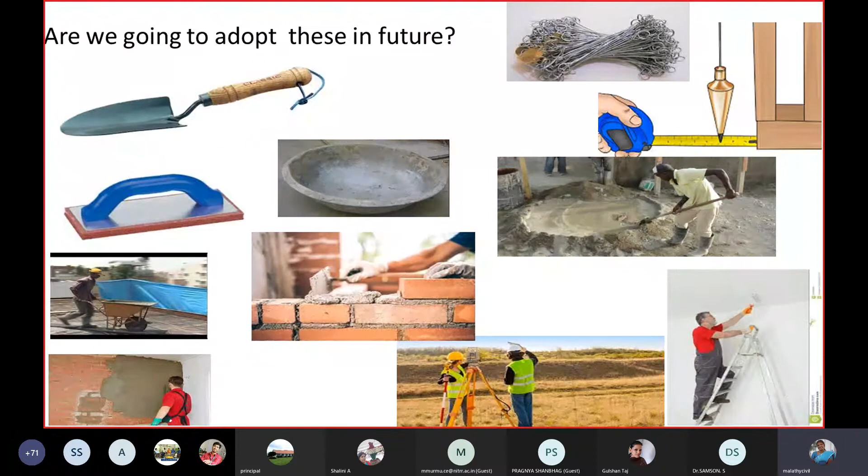So if this is the case, what are we going to do in the construction industry? Are we going to adopt all these things in future also? Definitely not, we have to go with digital construction. Why do we have to go with digital construction?

Definitely it is faster and cheaper. It will provide proactive safety and collaboration, real-time communication and automation. So let us see one by one.

If you see this faster and cheaper aspect, definitely digital construction is going to increase visibility, improve workflow, and streamline the scheduling.

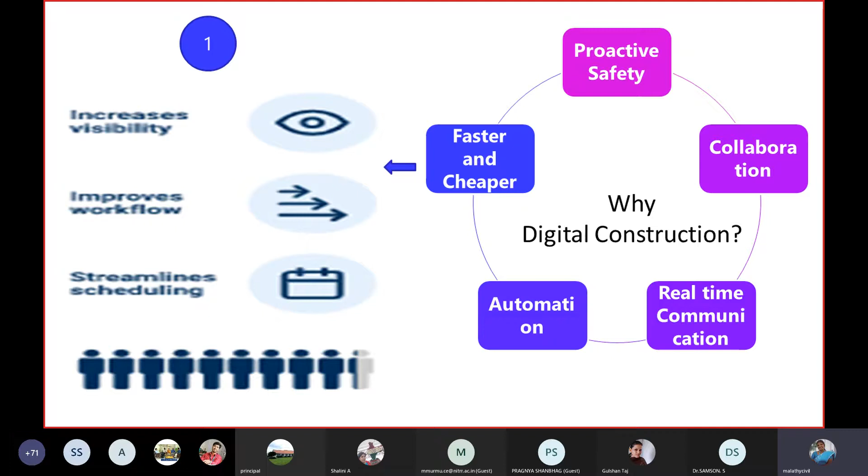And proactive safety, in the sense, it will shorten the response time and log and track safety inspections, then increase documentation and accuracy.

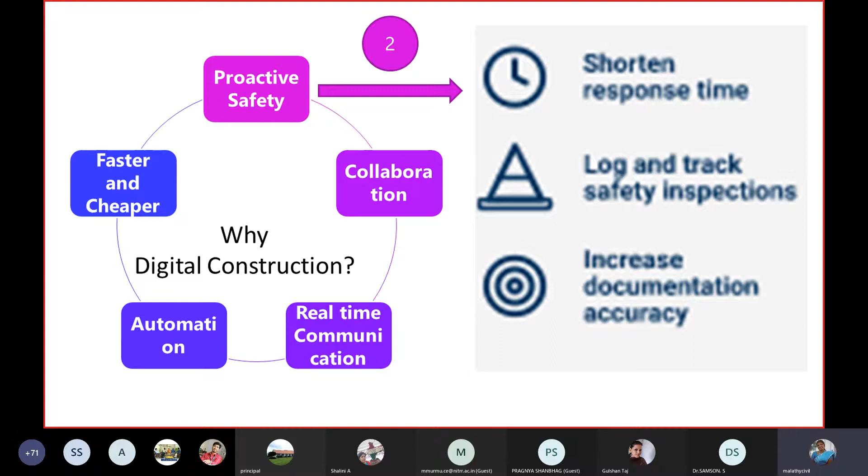And regarding collaboration, definitely with this digital construction, you can go with real-time collaboration, digital punch lists, improved quality control, then collecting digital signatures. So instead of getting a signature and having that document passed, you need not wait for a long time.

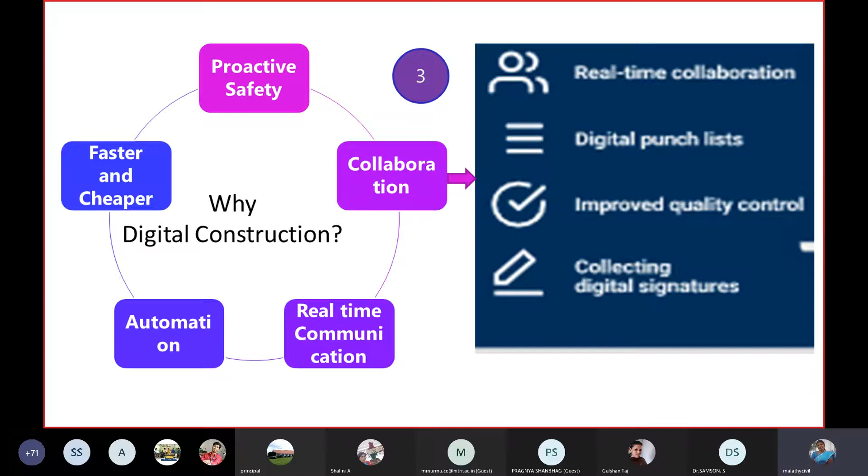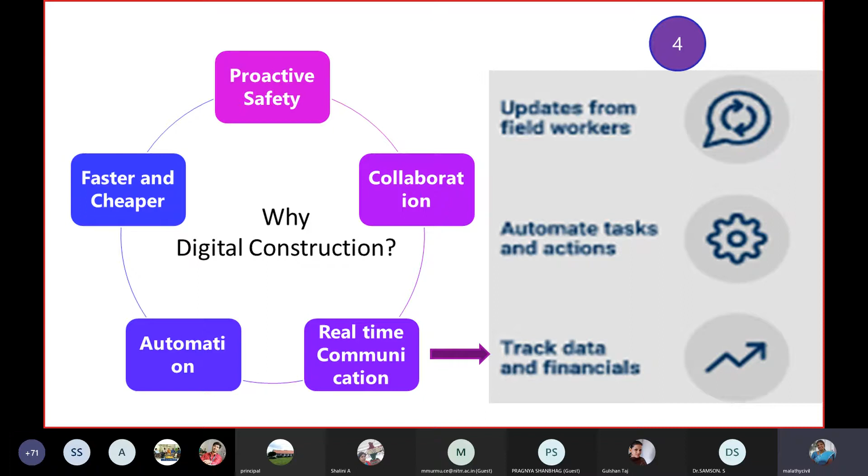Next is real-time communication. It will update the field work, whatever they are doing, and it will automate tasks and actions, and track data and financials. And finally, that automation is also possible with digital construction.

So far, 93% of construction industry players agree that digitization will definitely affect every process. But if you see the statistics, only less than 6% of construction companies make full use of digital planning tools.

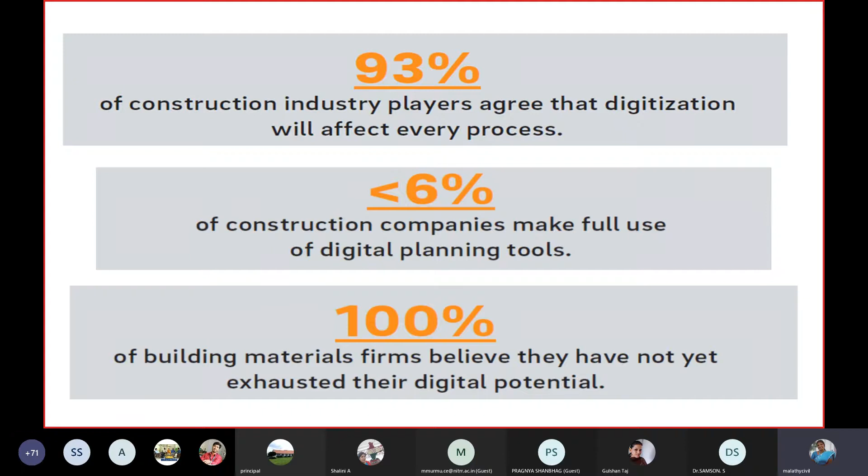100% of building material firms believe that they have not yet exhausted the full potential of digitalization. So in this scenario, with digital culture and digital transformation, there is no alternative to digitization.

Unless in civil engineering or in the construction industry we adopt these things or digital transformation, definitely we will be out of the market, because now the customer's expectation is that everything is very fast and they have to get the service within no time.

So if this is the scenario, only in the construction field are we taking months together and years together to complete the project. In such a way, ignoring digitization is a mistake.

So what we have to do in digital transformation is automation, digital access, connectivity and digital data. All these four are very, very important parameters in digital transformation.

When you see the digital culture, all the industries, all companies, corporates, have started adopting this digital culture. Only thing, the production and construction side is getting its attraction slowly, but it is the need of the hour.

So what are the recent technology trends in construction and civil engineering? You all know that building information modeling, BIM, is the main thing which has been started by most of the industries and which is gaining attraction and interest towards the construction industry.

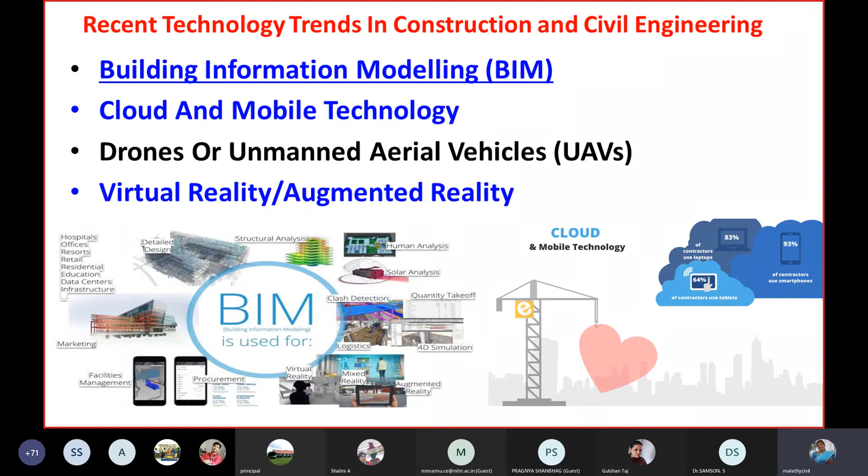Then cloud and mobile technology, drones or unmanned aerial vehicles, virtual reality, augmented reality. Recent technologies again, if you see, 3D printing, artificial intelligence, robotics, exoskeletons.

Then the connected job site - this is very, very important. The job site is connected so that everything is transparent and you can get the information then and there.

And then you can have autonomous vehicles. Already in the US they started using these autonomous cars and vehicles, particularly in the construction industry, using autonomous vehicles like RMC or other equipment handling vehicles. All these things can be driverless.

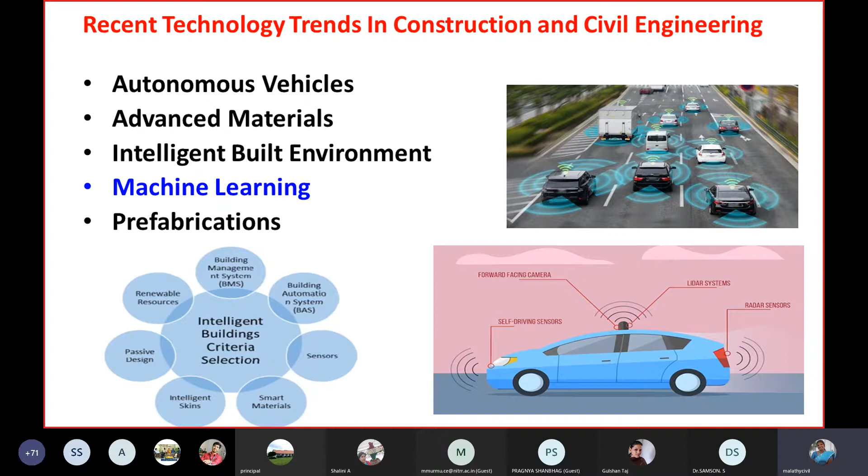This can be operated from one end, so the best utilization of equipment is possible with these autonomous vehicles. Advanced materials, intelligent built environment, machine learning, prefabrication, and predictive analytics means we can predict what is going to happen, when there will be a delay. Everything can be predicted, and accordingly we can take necessary action beforehand.

Then the software and data ecosystem. For example, here you can see scanning solutions. We can scan the total building through some technology so that we will learn where the reinforcement is. For example, if the building was constructed some years back, you don't have any drawings. With this scanning technology, you can very well understand what is the foundation depth and what steel reinforcement is provided. Everything you can get from that.

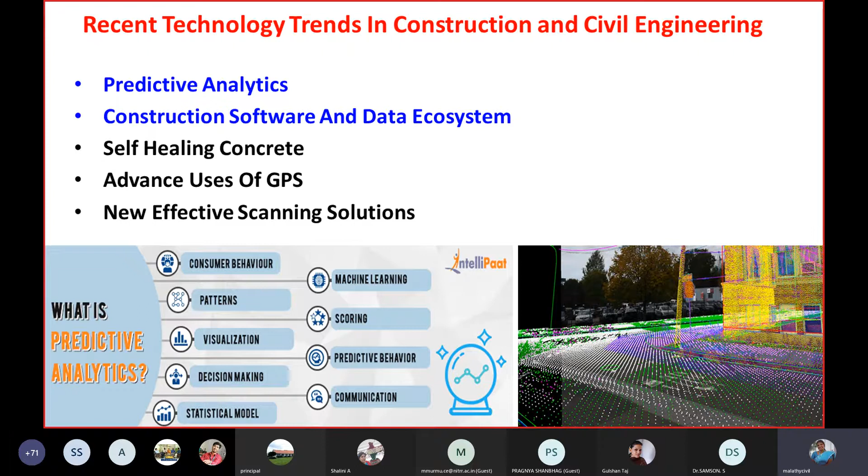Then advanced uses of GPS and others. So there are some ten construction technologies that are going to play a role in the future.

One is big data. Big data means we can collect data from weather, traffic and environment so that we can improve the efficiency of construction activities.

Artificial intelligence and machine learning can increase the building lifetime and enable better design of buildings, and this AI can leverage automation for repetitive tasks that increases productivity. Up to 30% of business time can be saved using this artificial intelligence technology.

Internet of Things is smart machinery using sensors. You can have smart applications, improve productivity and efficiency, reduce the carbon footprint, and also increase safety.

Then the fourth technology is robotics and drones. Robots can also be used in the construction industry, and drones can be used not only for surveying purposes, but many other applications are there with drones.

And 5G and Wi-Fi. 5G technology is going to make a tremendous transformation in the construction industry because it is going to be very fast and quick.

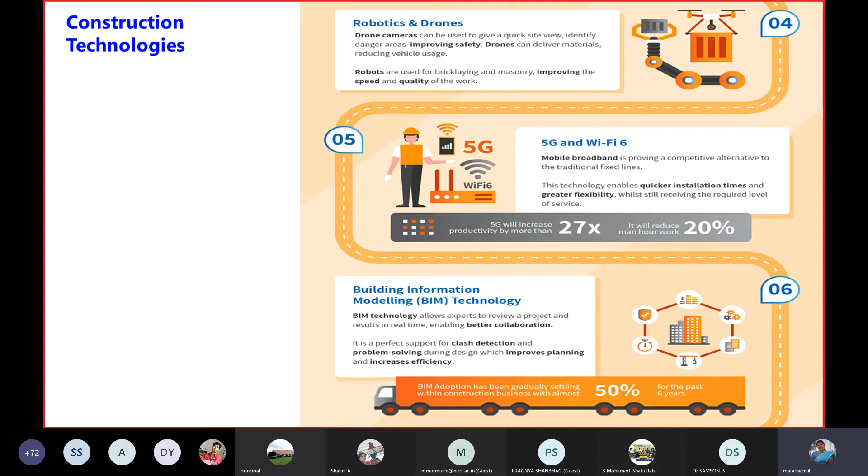The seventh technology is augmented reality and virtual reality. Normally when we go to a client and explain with a 2D drawing, they cannot understand it well, but with AR/VR you can very well explain the planning, what you are going to do, and how the output of the project is going to be. Everything you can virtually show to clients, and they will get the desired output they want.

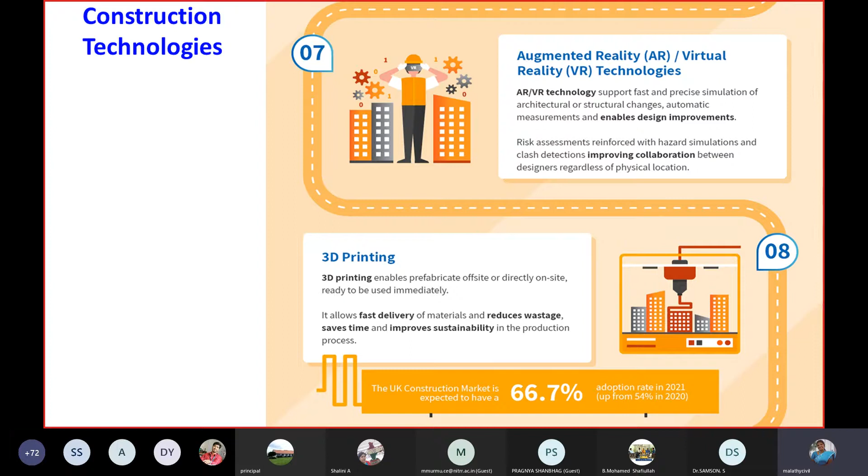And 3D printing is going to be again a cutting edge technology in the construction industry. We can have 3D printed homes, which will reduce wastage, allow fast delivery, save time and improve sustainability.

The ninth technology is mobile and cloud technologies. This cloud technology will enable the storage of high-end images, data and more in the cloud. Normally when you store everything in your laptop or desktop, the installation and retrieving time is going to be very high. Whereas due to this cloud technology, everything can be stored in the cloud, which will enhance improved collaboration and information sharing.

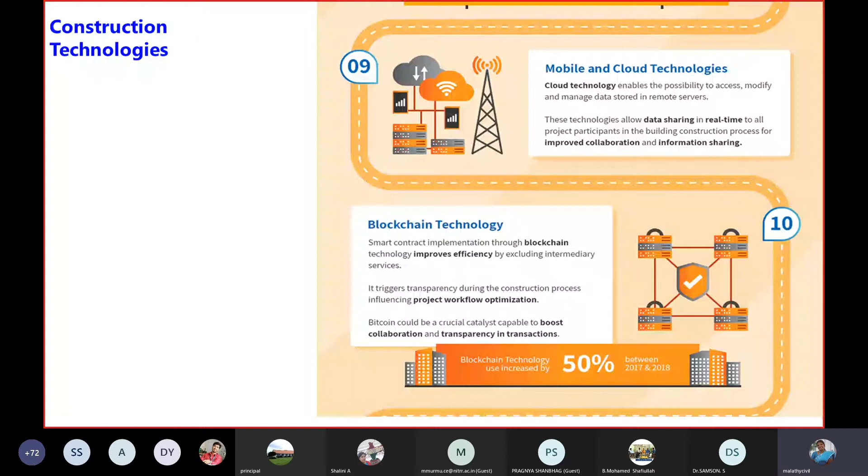Blockchain technology improves efficiency by excluding intermediary services, and the project workflow can be optimized. So blockchain technology use can increase about 50% year on year.

So these are all the cutting edge technologies going to happen in the construction industry. For surveying, hereafter drones are going to be used 100% instead of leveling, theodolite and total station, which consume a lot of time.

Whereas when we go with drones, which will be very accurate as well as very fast, and for planning we can go with AR and VR, and for construction we can go with 3D printing, smart homes, IoT applications, and machine learning and robots. And for execution of the construction, we will go with modular construction. 5G technology is going to make total digital technology in construction industry very fast. So all these things can be integrated with BIM technology also.

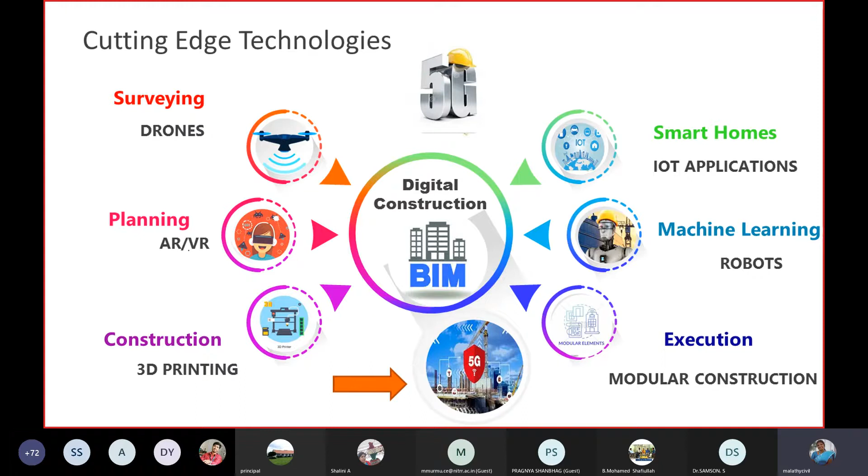So let us see one by one what are these technologies, how they are going to be adopted in the construction industry. There are 6 technologies which are going to be implemented, and have started implementing, which are going to change the entire scenario in the construction industry.

So far what we thought is the construction industry always takes months and years of time to complete the project, and it is messy and dirty. Wherever construction is going on, it creates pollution, noise pollution, and all. There is no technology involved in construction industry, only the traditional method of construction is going on. All of this is going to vanish, and new technologies are going to come up in the market.

It has already started. So within another 3-4 years, unless we adopt these technologies, we will be obsolete and we will not be in the construction industry. Virtual reality, augmented reality, modular construction, 3D printing, drones, Internet of Things, and artificial intelligence.

In this overview of digital transformation in the construction industry, I am going to explain these 6 technologies to you in brief. In forthcoming sessions, the speakers will explain each and every technology elaborately. I am just going to give you an awareness about these technologies, how they are going to be used in the construction industry.

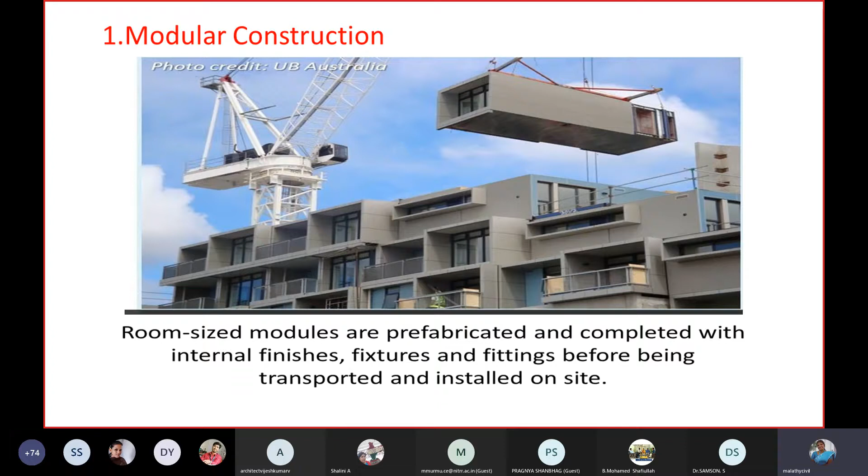In civil engineering, what we feel so far is standing at the site looking after everything, dealing with uneducated laborers, and checking quality each and every time. But if it is made in the factory with standard quality, which is checked, then it is brought to the site with complete finishing.

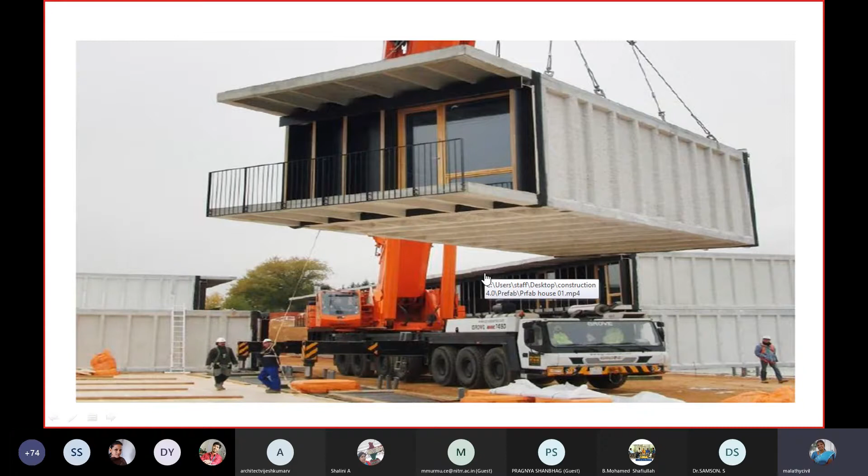This is going to happen, and if you see this particular video, you can understand better how this office building, with the door finish, all these completed rooms, is being erected on the site.

Can you see the video?

Yes, ma'am. Yes, ma'am. Yes, ma'am.

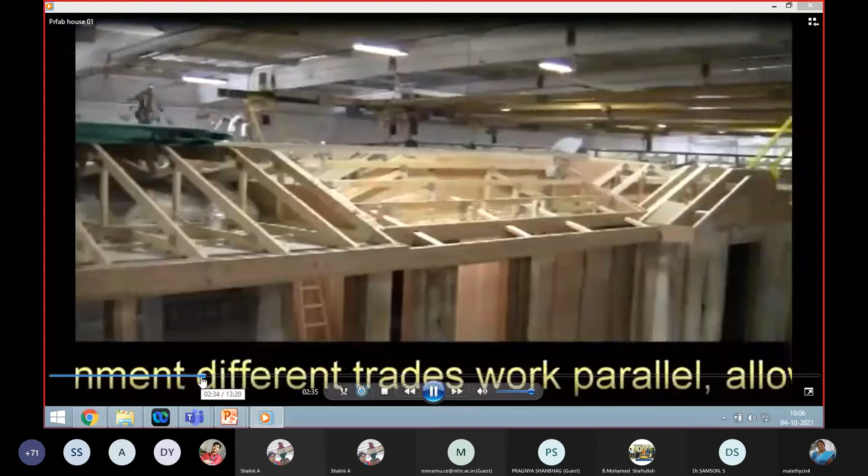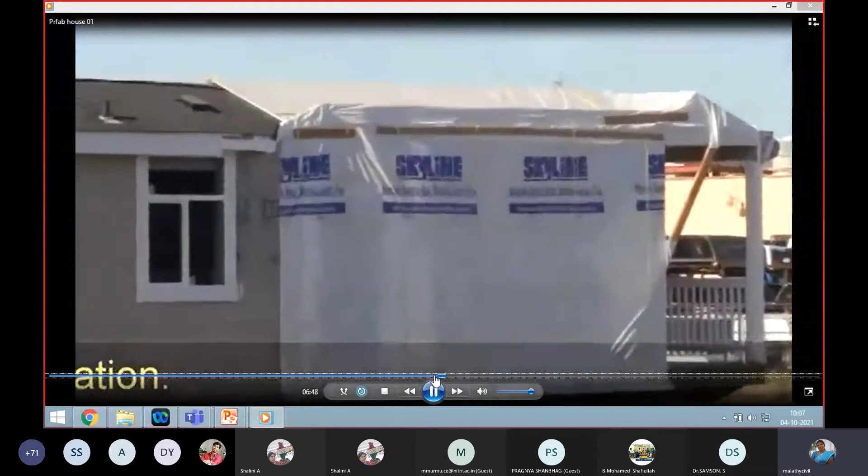This particular building is factory made and assembled at the site. It has been done in the factory and then assembled at the site. This is modular construction, in which each module, not room but module, for example for each floor, can be done in the factory and assembled at the site.

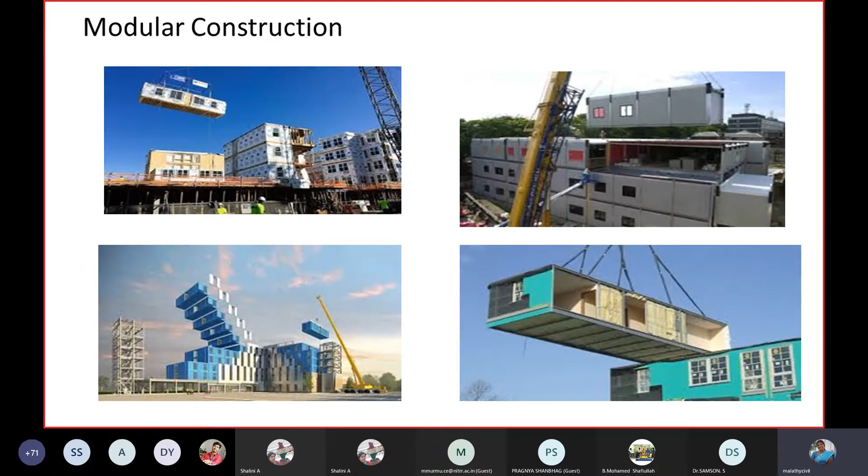The second technology is virtual reality and augmented reality. Here we use some tools and software on our mobile phone, laptop or Apple iPad. By having these tools, you can view the 3D view of a building from your 2D drawing.

This is augmented reality and this is virtual reality. In augmented reality, one uses a mobile phone, and from the mobile phone, if you view an object with a drawing, you can view it as a 3D object. For a building, not only for planning but also for interior decoration, where you can put sofa and furniture, everything you can view virtually from the mobile phone. It is not there, but it seems to be there. That is augmented reality.

In virtual reality, you wear a gadget like a helmet or glass, through which when you see bare land without any construction, you can see that there is a building. The building plan and elevation, everything is put into a software, and given to this gadget through a memory card. When seen through the gadget, you will automatically see the building, wall, beam, column, floor finish, everything, and you can touch and feel it like a real building. That is the difference between augmented reality and virtual reality.

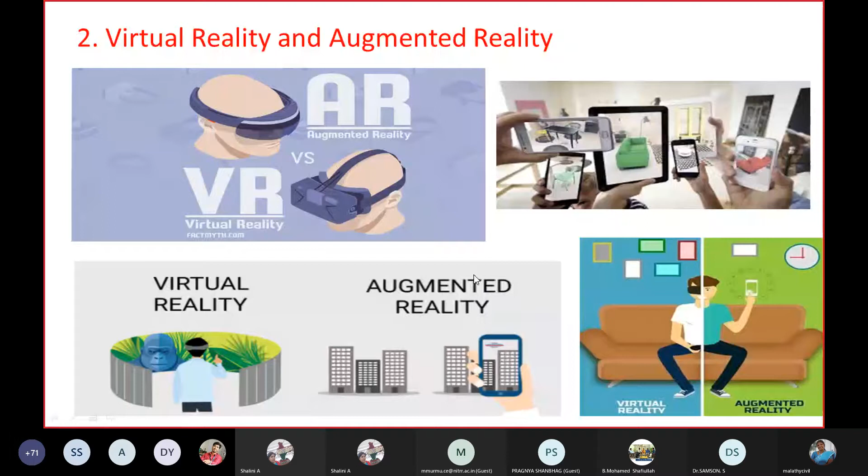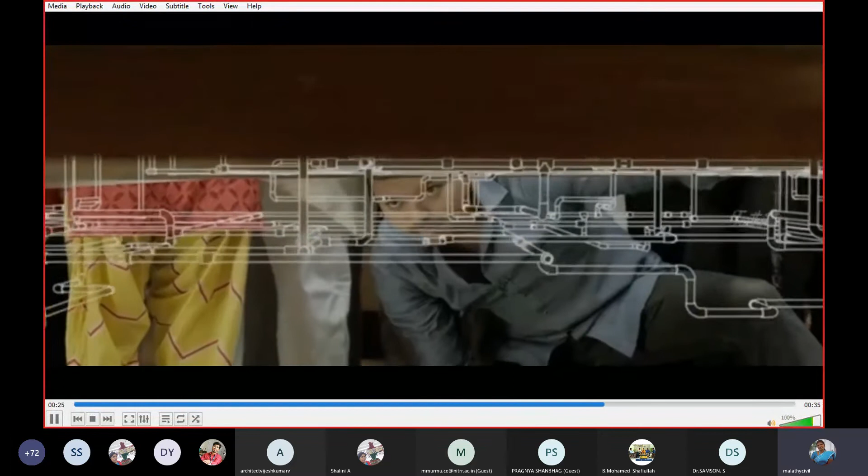This is the two-dimensional drawing, but he is able to view it. This is called augmented reality. He should have used some mobile phone or laptop, but here they are showing that the naked eye is able to see it. This is augmented reality, where you can see things through the mobile phone.

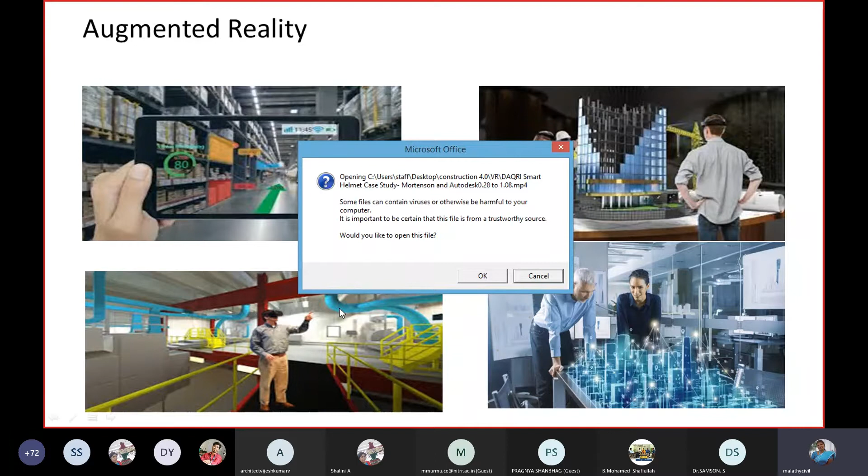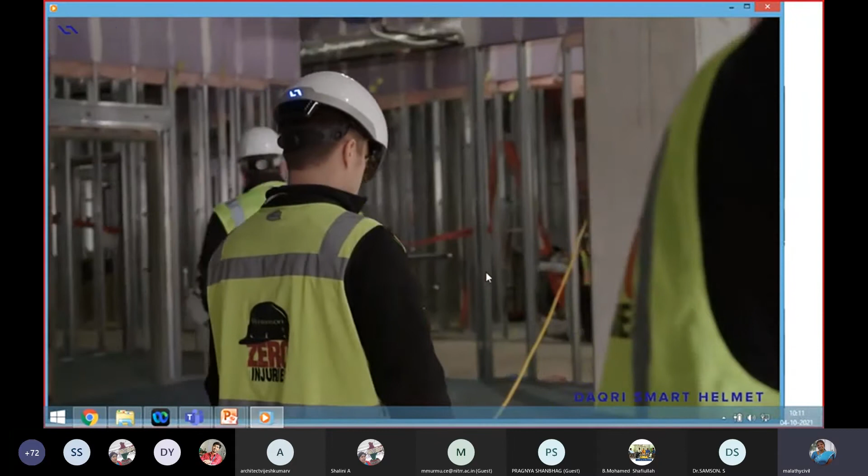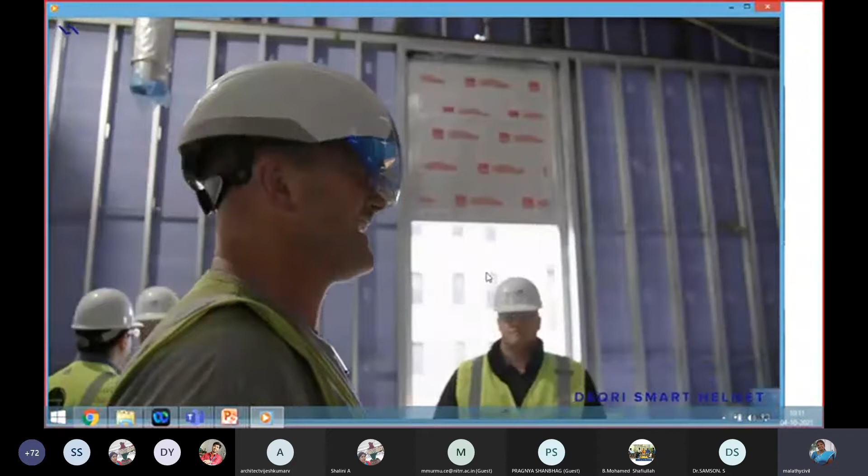This is augmented reality. Here this particular person is in a building where the pipelines are coming and the AC ducts are going. All these things can be seen virtually, and if there is any change needed, it can be made. By wearing this helmet, one can see virtually where the pipelines are going, where the air duct is going, where the electrical lines are, everything can be seen. This is MEP drawing, from which he can see the plumbing lines, AC duct and all.

Before completing or finishing the work, one can view it virtually to check whether it is right or not, or if any change needs to be made. Everything is possible with this augmented reality.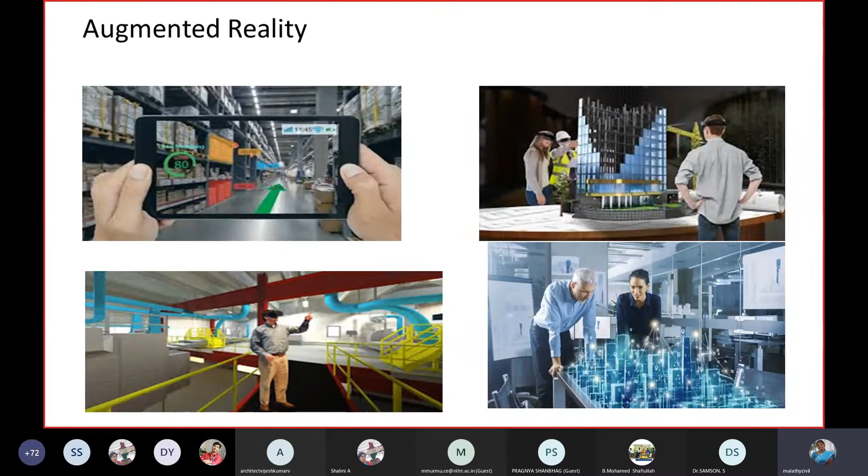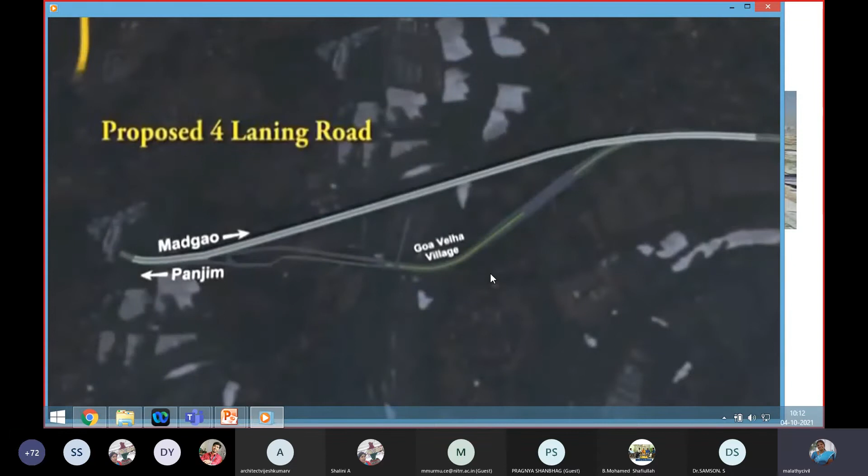This is a project, for example a flyover or bridge to be constructed. This is a proposed bridge on River Zuari. How this proposed bridge is going to happen can be explained through AR and VR technology to the client, the higher authority, or the minister. Then they will understand better how the proposed project is going to happen and how it is going to be finished, so the approval of the project will happen very fast.

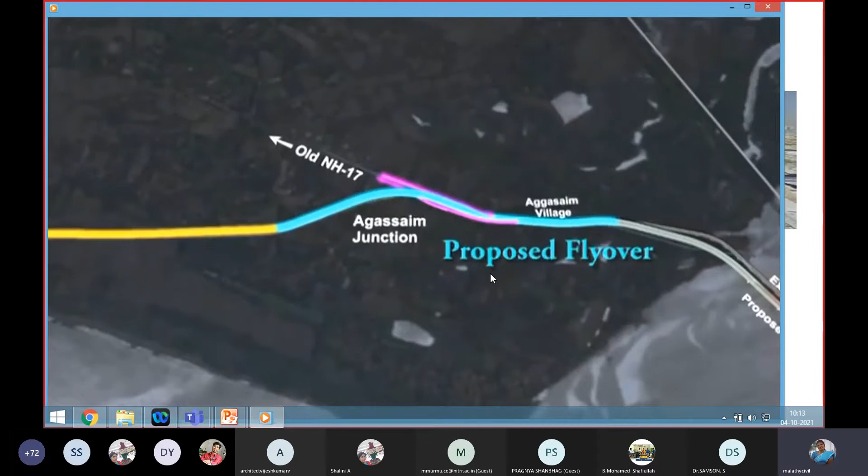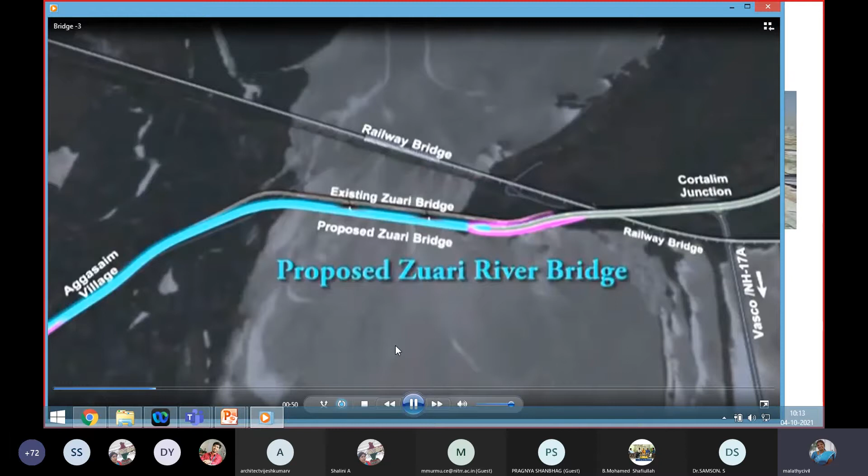Suppose for a client with an ordinary residential building, if you show them a two-dimensional drawing, they may not understand where the bedroom and other things are. But if you adopt this technology, definitely they will understand better. So this is about augmented reality and virtual reality.

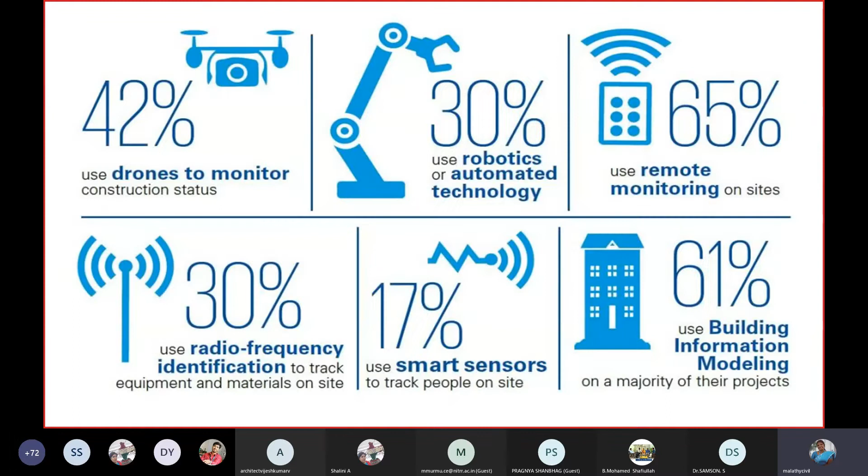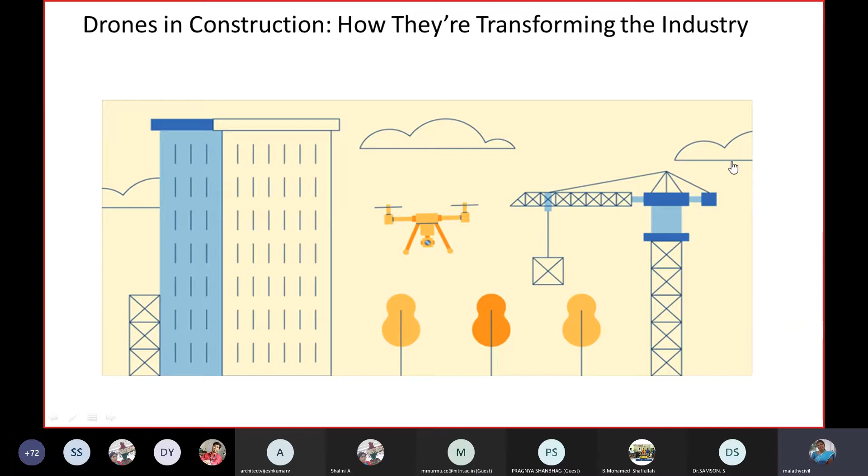The third technology is the drone. The drone is a small robot like the helicam, or unmanned aerial vehicle, which can be used in the construction industry. Where you cannot go and inspect, this drone will fly from top to bottom, and correspondingly you can view what is going on at the site.

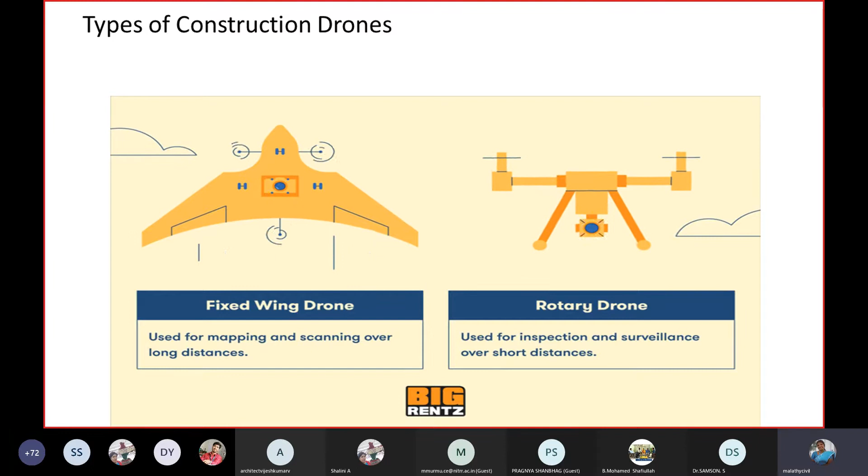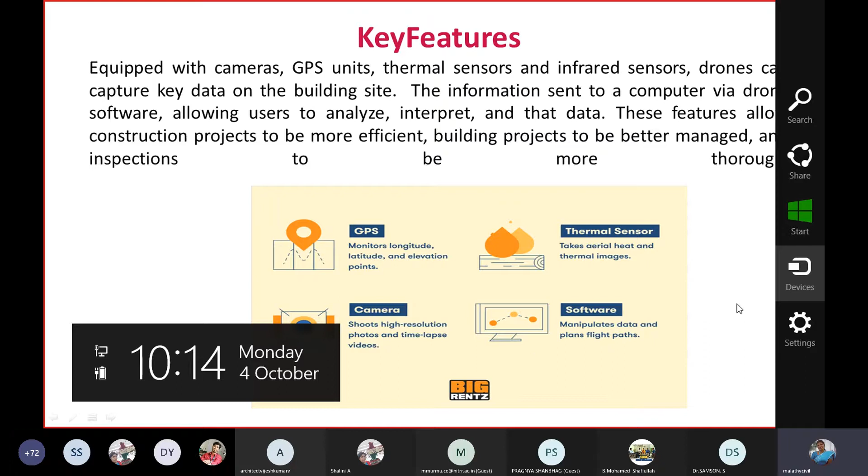There are two types of drones: fixed wing type and rotary type. The key features are GPS, thermal sensor, camera and software, so the drone can fly over whatever path you have given it, capture images and videos, and using software you can interpret the results. This can be used for mapping and land survey, and simultaneously you can view it from your office itself as the drone captures the images.

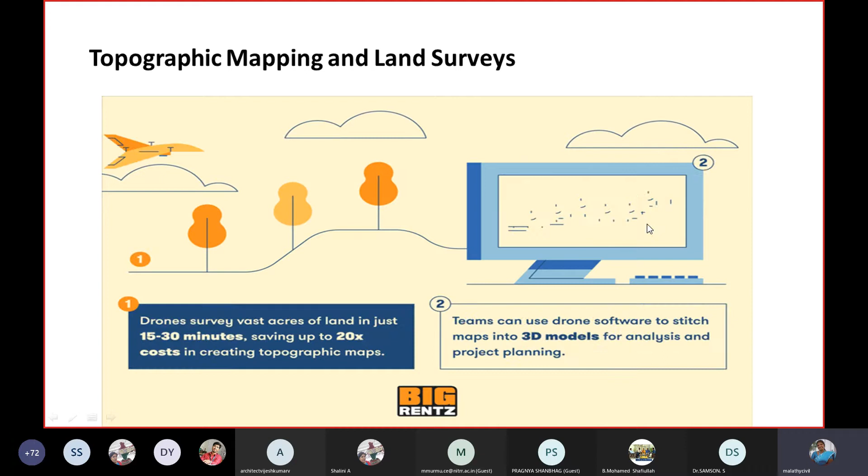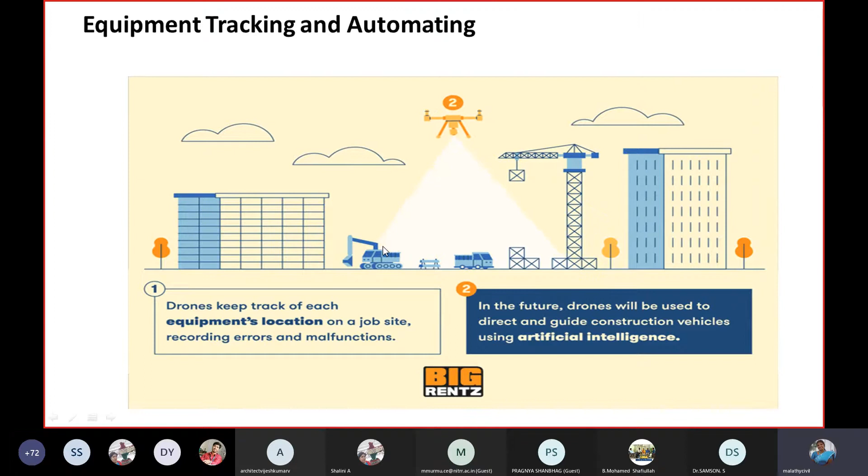It is very fast when compared to traditional methods of surveying. For equipment tracking also, the drone can be used to track where the equipment is, and whether the purpose of the work is over, then whether it can be used for another site. Everything can be planned according to the drone image.

We can monitor the buildings. Bill of measurements also can be done using the drone. The day-to-day progress of the work can be viewed through the images captured by the drone. And for security surveillance, whether any unwanted person is there in the site, it can be known to the concerned owner.

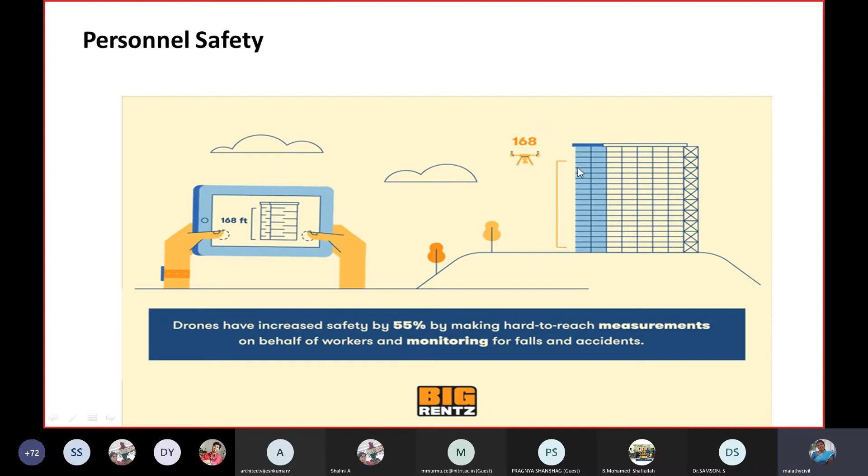This particular building is about 168 feet in height. One cannot go and inspect it, but the drone can go from top to bottom simultaneously, and one can view what is happening there. So structural inspection also can be done. If there are any cracks or anything, we can detect it from this drone.

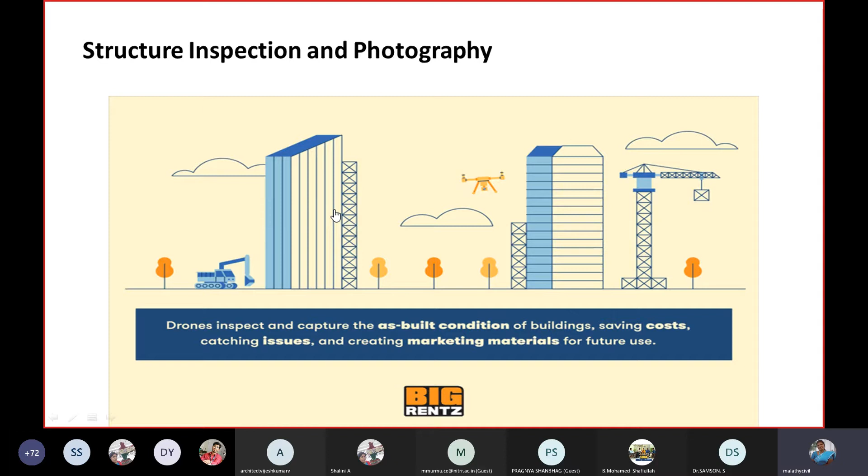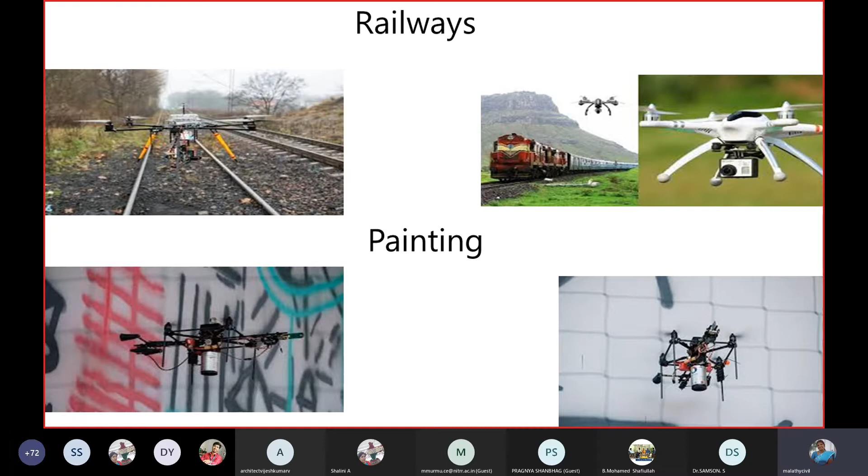For railways, painting also can be done using the drone. In the forthcoming session, the resource person is going to explain clearly about the drone and how it works, including crack detection. Even for road repair, we can use a small 3D printer attached to the drone.

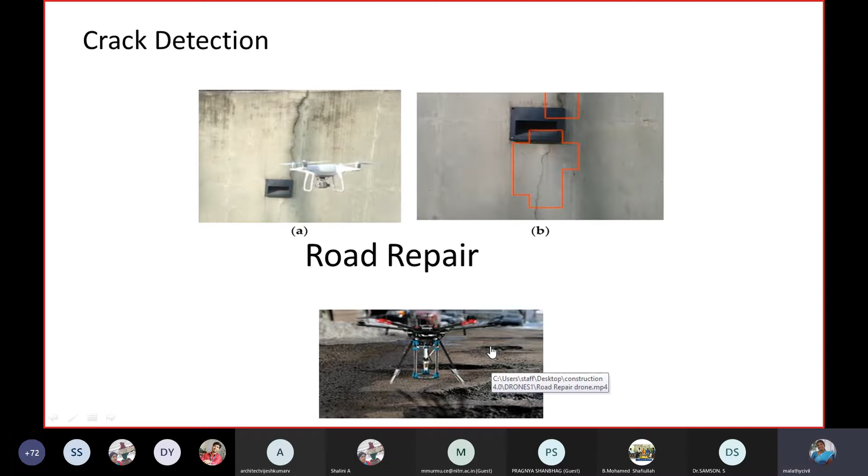The fourth technology is 3D printing technology. Normally 3D printers now are being used for jewelry, for making jewels of desired computer-designed shapes, and for making small models. Before starting the project, you can show the model of the building to the client. But the 3D printer can also be used for printing a home.

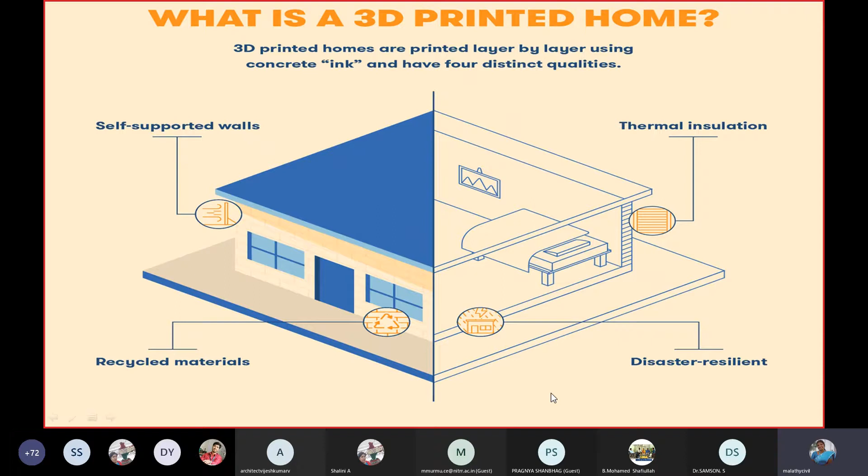In the next session, Dr. Manasandanam is going to explain about 3D printing technology. This 3D printed home is going to be the future. We can adopt some innovative materials and the green building concept also in this, with self-supported walls, thermal insulation, disaster resilience, and recycled materials.

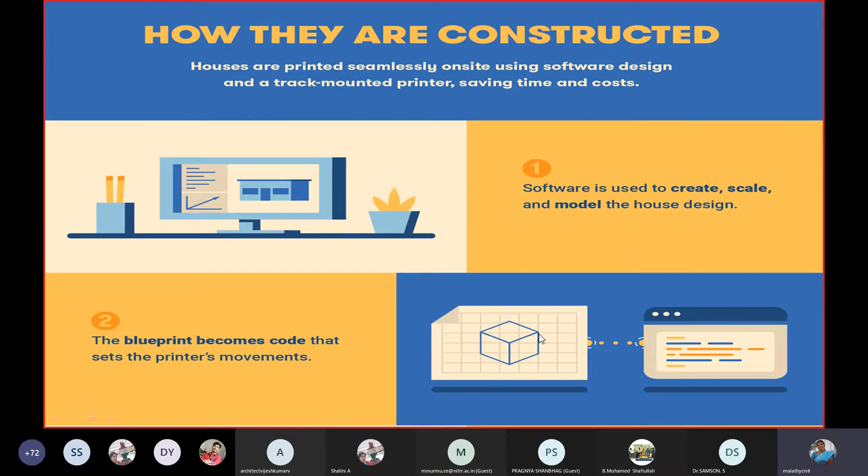So the first thing we have to do is create a scale model of the house we want to construct. That design is installed using some software, and then the blueprint becomes code. We fill the desired concrete mix into the printer, and the printer creates shapes according to the design installed in the software. The layers of the concrete mix are stacked and the pattern forms.

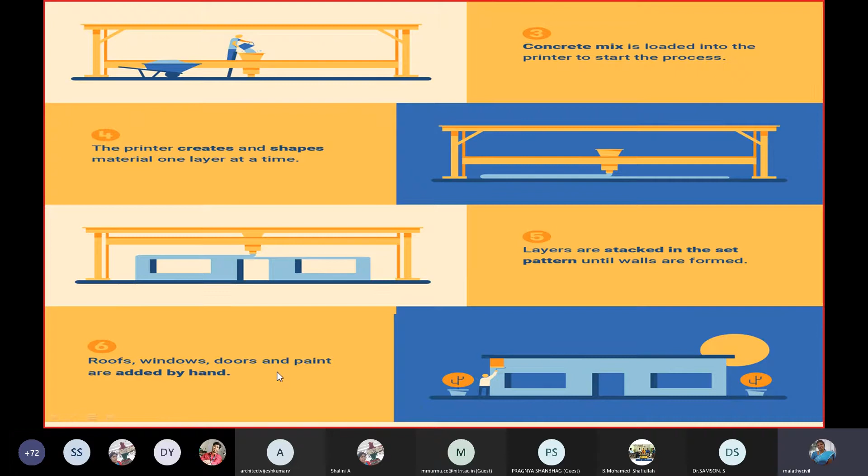Then we have to allow for the roof, window, door, and so on, which are added manually to the building. So the 3D printed home will take only 24 hours to complete a 2400 square foot building. See this video.

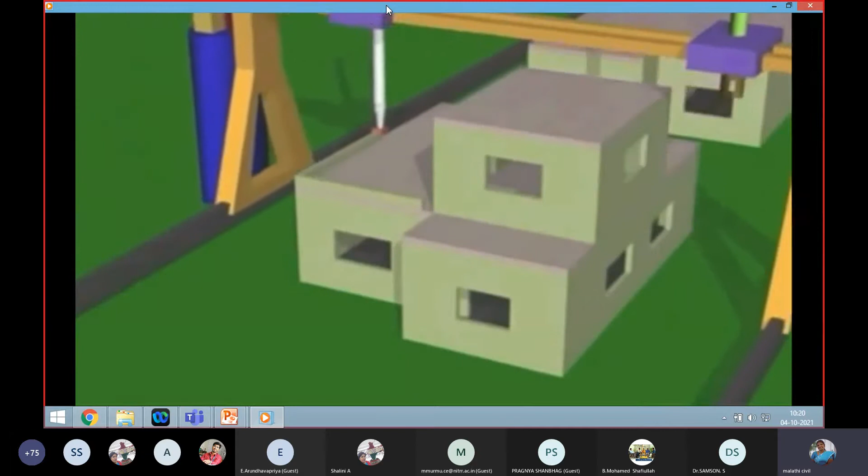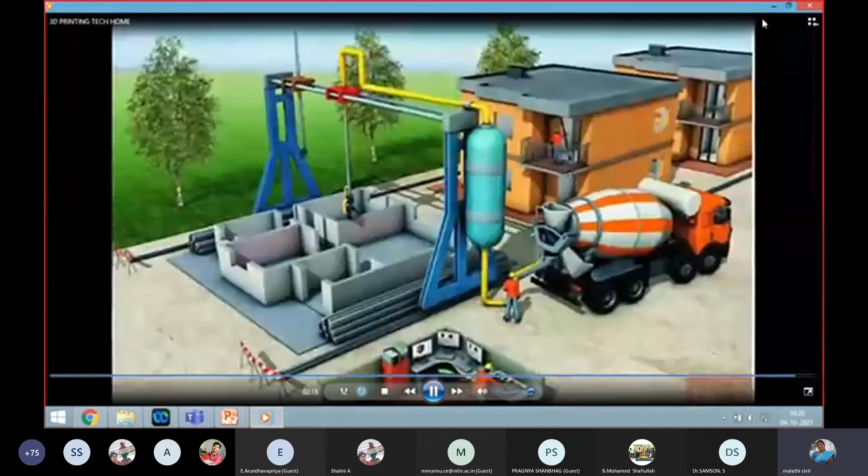So by this way, using a 3D printer, we can very well construct low cost buildings. Suppose the government is aiming to provide low cost homes to the public, about 1,000 buildings of the same nature. By using this 3D printer, we can construct the building at a very fast rate with quality, without labor intensity, and without pollution. So this is the next cutting edge technology which is going to come in the construction industry.

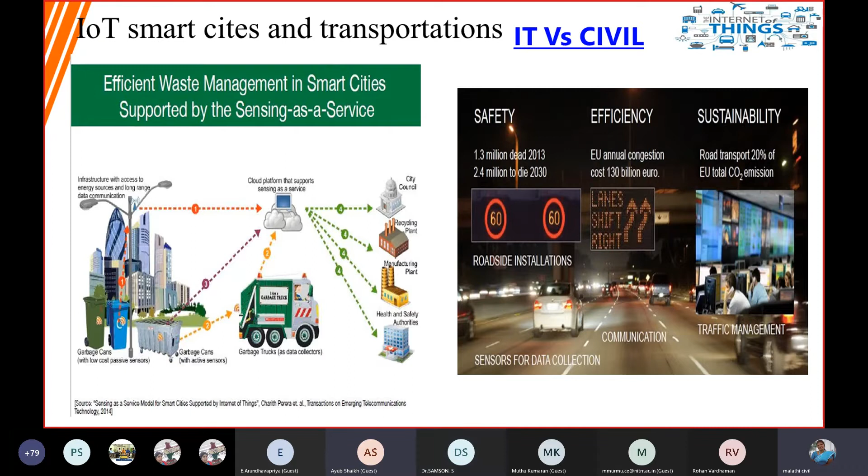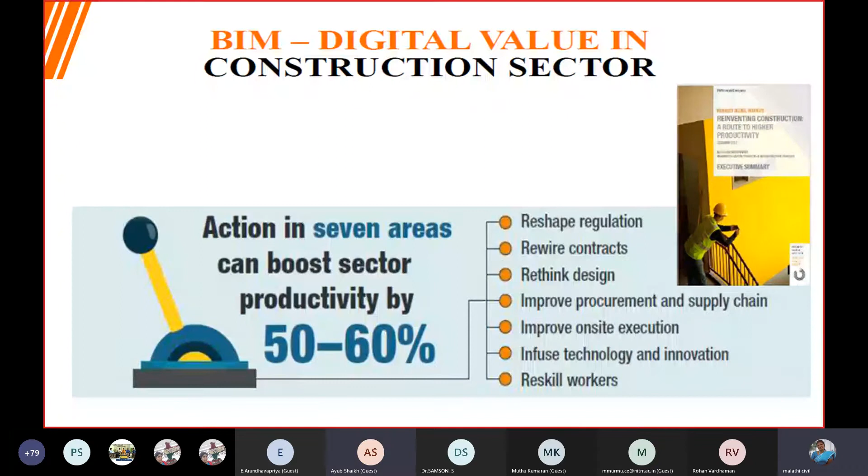We can boost our construction sector productivity by 50 to 60% in 7 areas by reshaping regulation, rewiring contracts, rethinking design, improving on-site execution, and reskilling workers.

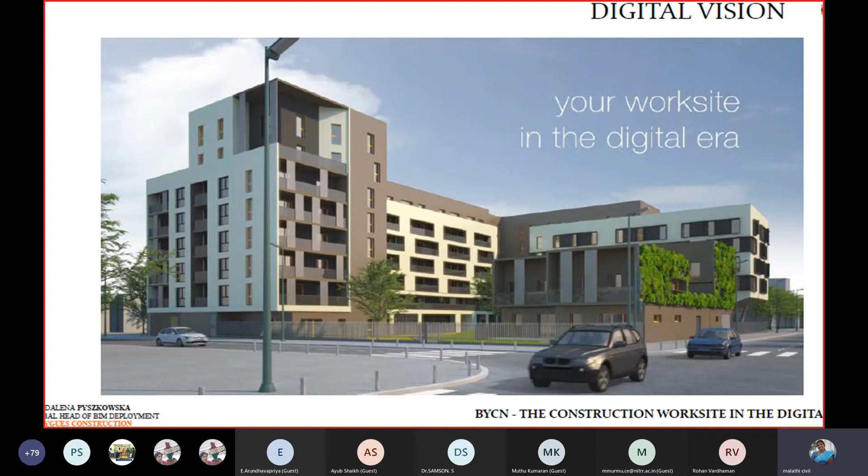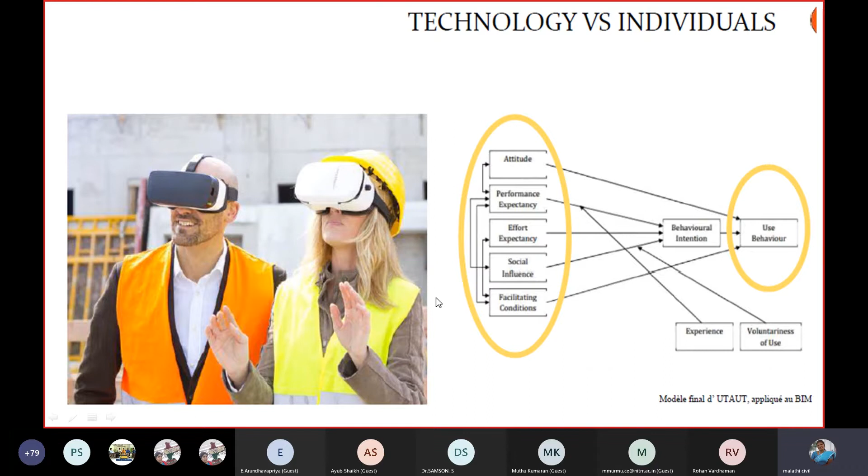Technology versus individuals: so far what is going on in any industry, particularly construction, is command mode. In command mode, there is a top person, under him four authorities, and from those four there are subordinates, so any information or approval happens from top down the hierarchy. Whereas in command of team, within teams there is some command, so they can be informed and transformation communication within the teams is possible.

But now with BIM we are going to have teams of teams. Everybody in the industry, everybody in the project, is well connected together, so that teams are connected to teams. Teams of teams play a role in this BIM so that any activity or project can be completed within a stipulated time, without delay in getting approval from the right authority.

So everything is connected, well connected through the tools and technologies, through IoT, and through BIM. The teams of teams approach is going to be very transparent and very fast to complete the project. So in BIM, what is going to be adopted is teams of teams.

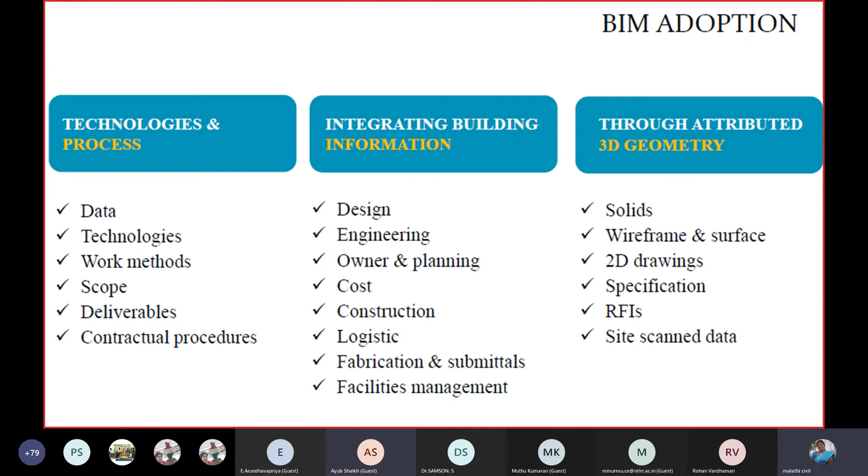BIM adoption involves technologies and processes integrating building information, also through attributed 3D geometry, which is possible with this BIM adoption. The sixth one is machine learning. Machine learning is nothing but artificial intelligence in construction.

We can train robots for any type of construction activity, so the robot can play the role of laborers. Nowadays, in the pandemic situation, we face the problem of handling laborers and getting labor is a problem. But if the robot is trained properly to do some activity, then definitely it is possible.

Artificial intelligence in the construction industry covers site layout and alignment, selection of projects, planning and scheduling, cost and production estimation of projects, contract management, and traffic and accident management. Everywhere we can adopt this artificial intelligence in the construction industry.

Already robots are in use for construction activities like bricklaying, demolishing, and for handling tools, materials, and accessories to the site.

Now the thing is cobots - the robots become cobots. What is a cobot? It's the collaboration between the human and the robot. Part of the work will be done by the robot and the remaining by the human, so there is synchronization between human being and robot, which is called cobots in construction.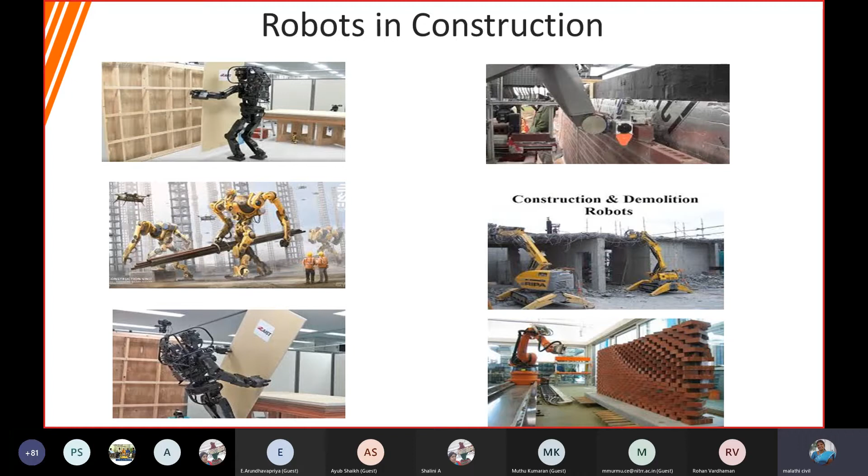The growth of digital construction is going to be like this: year on year growth is going to be 50%, modular construction year on year growth is going to be 75%, and prefabrication 99%. The difference between prefabrication and modular construction is that in prefabrication, each and every component or element of the building is fabricated at the factory and brought to the site. Whereas in modular construction, room-like modules are made in the factory and brought to the site.

3D printing, 70% growth year on year. Automation, 118% growth year on year. And artificial intelligence, 243%. So artificial intelligence and IoT are going to play and dominate the construction world in future.

We should not say that I am a civil engineer, why should I know about AI and IoT and all that. Unless we adopt these technologies, our industry will not grow, and we cannot make our customers very satisfied.

By satisfying the customer, we have to complete the project with the standard. So far the construction industry is unorganized, so we can make it organized, standard, quality, fast and providing customer satisfaction. So that is very, very important.

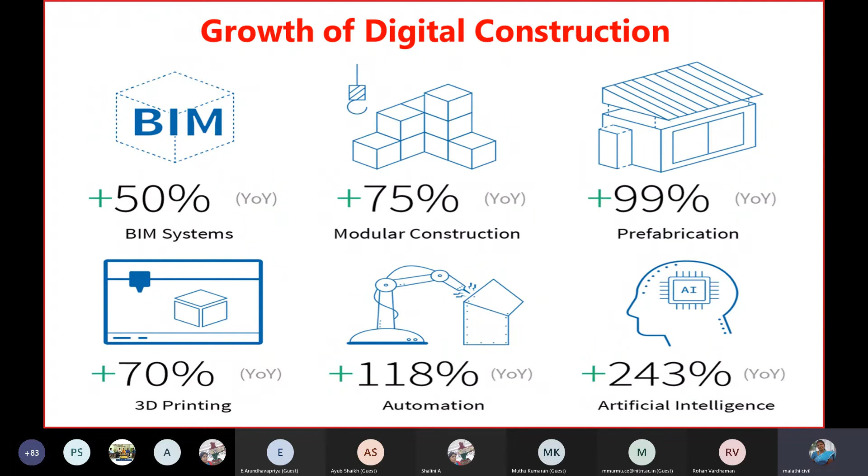But by having these technologies, we can make our system organized and everything standard, and the client will not feel that the contractor is cheating, and the contractor will not feel that they are not getting enough profit. So we can make everything systemized and planned with these technologies, and make our construction industry a high-tech industry like the IT industry. Everything is possible with these technologies.

Digital roads have also come up with solar powered roads, smart roads, and electric priority for charging vehicles. Hereafter we will have electric vehicles, so charging priority will be there, and the road will glow automatically during dark time. There are also interactive lights in roads. So the road itself we can make digitalized, making it eco-friendly, user-friendly and smart.

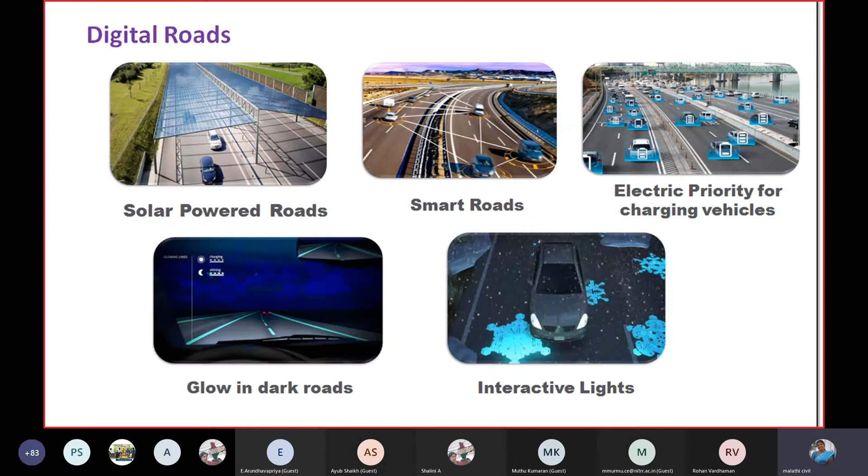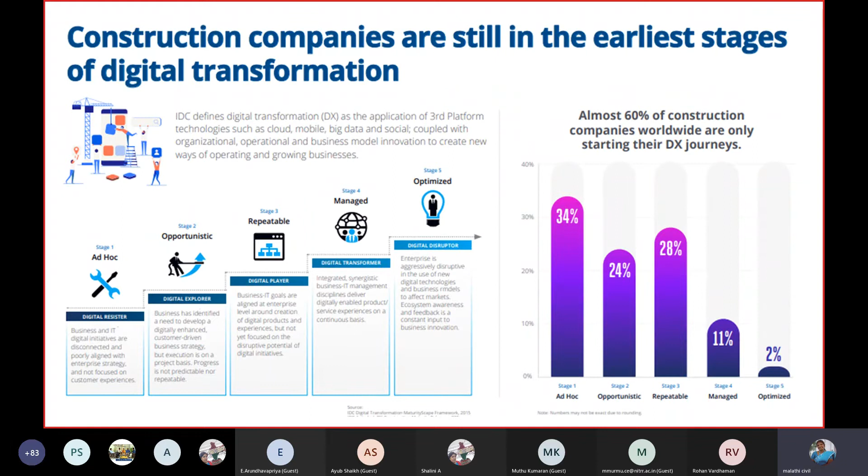Construction companies are still in the early stages of digital transformation. Ad hoc stage 34%, opportunistic stage 24%, repeatable 28%, managed 11%. Only 2% of the construction industry are optimizing the full potential of digital transformation.

There are 5 key challenges in construction companies going into digital transformation. There are some deadlocks like outdated key performance index, lack of innovation, the need for initiatives, and there should be some practical plans, along with limited expertise.

When you go with this digital transformation, everything should be organized and planned. Now we are going in an ad hoc and haphazard way in the construction industry. All these things should be changed in a standard and systematic way for transformation into digital transformation.

Now the mestris or local persons are playing many vital roles in construction. Unless we, the digital civil engineers, the millennial civil engineers, make changes in the construction field to make it very standard, systematic and quality, these people will continue dominating. If we act, we can make the system very standard and quality, and digital transformation is going to help us a lot for ruling the construction industry.

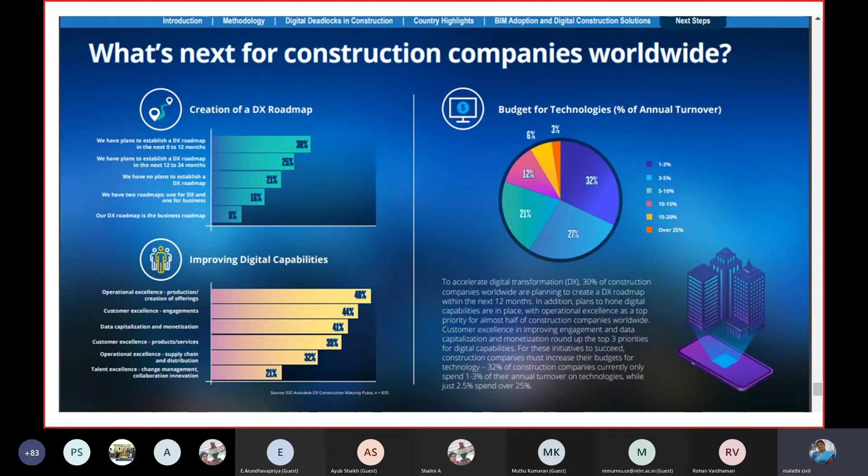What's next is that worldwide companies are creating a roadmap and improving digital capabilities, and budgeting for new technologies. The state of digital transformation in construction across the globe is like this: 70-72% of companies said this is a key priority, 58% of companies are only in the first and second stage, and only 13% are in the succeeding stage.

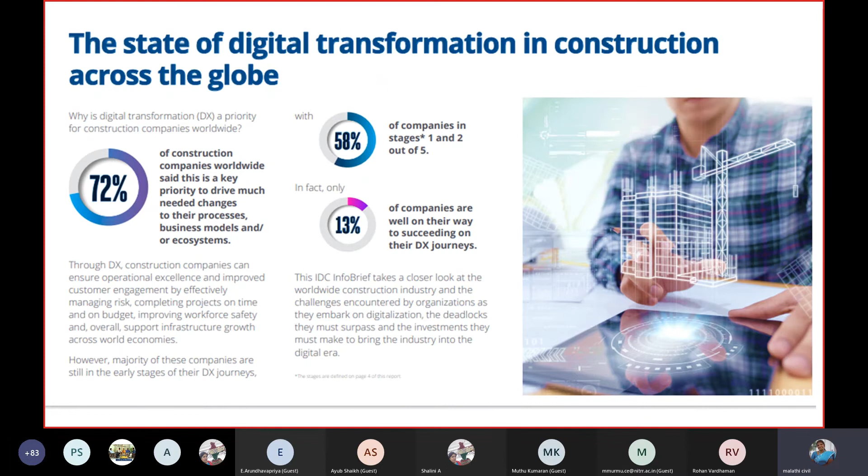So slowly all construction companies should take this up as a primary importance and adopt digital transformation stage by stage. There is a way to go towards digital transformation, like technology, communication, data, Internet of Things, automation, artificial intelligence and networking.

So with this, I have given you the overall picture about what digital transformation in the construction industry is, what we need to do as faculty members, what technologies we should be well versed in, and what technologies, tools and software should be imparted as skill development for our students, so that they can become startups and entrepreneurs, particularly in the drone area with very low investment. There are a lot of opportunities and scope in the future.

So we have to make some changes. We feel that in civil engineering, students are not getting attracted towards core branches like civil engineering and mechanical engineering. Just as mechanical engineering has transformed towards Industry 4.0, civil engineering also needs transformation towards Construction 4.0. Digital transformation is the need of the hour and needs to be implemented at a fast rate, so that we can keep the civil engineering and construction industry on par with the latest standards and technologies. With that note, I conclude my session. Is there any questions? I am trying to answer.